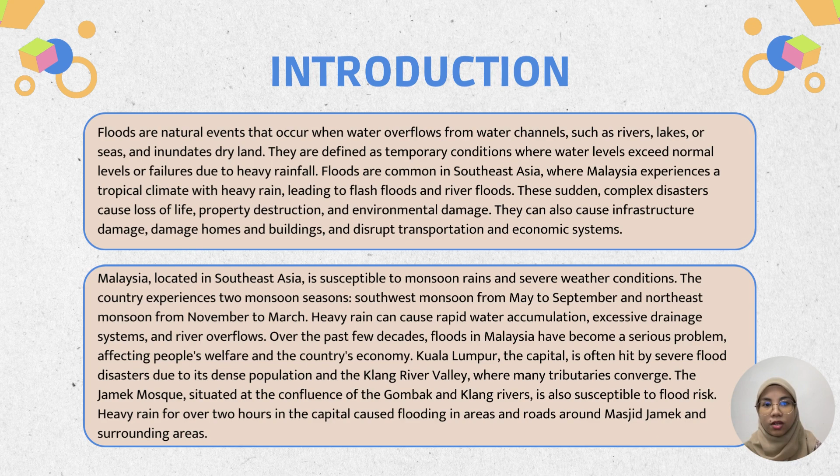Floods in Malaysia significantly impact infrastructure, agriculture, public health, displacement, and personal property. With a population of 5.7 million affected, floods impact about 10.1% of Malaysia's total area, causing annual losses of 1.15 billion ringgit. High sedimentation risk in rivers causes frequent and violent floods in downstream communities.

Flash floods are more common in metropolitan areas due to built-up drainage characteristics. Flooding affects 12% of Malaysia's population, affecting an estimated 29,000 square kilometers, which is 9% of the country's land area. Annual flood damage is estimated at 29.3 million on average.

In conclusion of our project, the hydraulic gate flood barrier is one of the good alternatives to prevent flooding and reduce the risk of flooding in the area. It can also save the lives of people and public property near the flood area. This hydraulic gate is an important element for our country, because our country is one of the countries that often experiences floods. Hydraulic gates play a crucial role in preventing and mitigating the impact of floods.

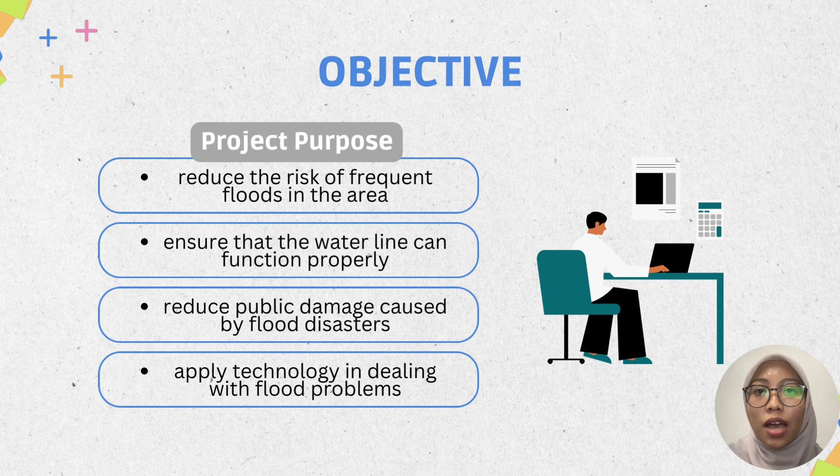There are 4 objectives of our project. First, reduce the risk of frequent floods in the area. Second, ensure that the water line can function properly. Third, reduce public damage caused by flood disasters. And the last one is to apply technology in dealing with flood problems.

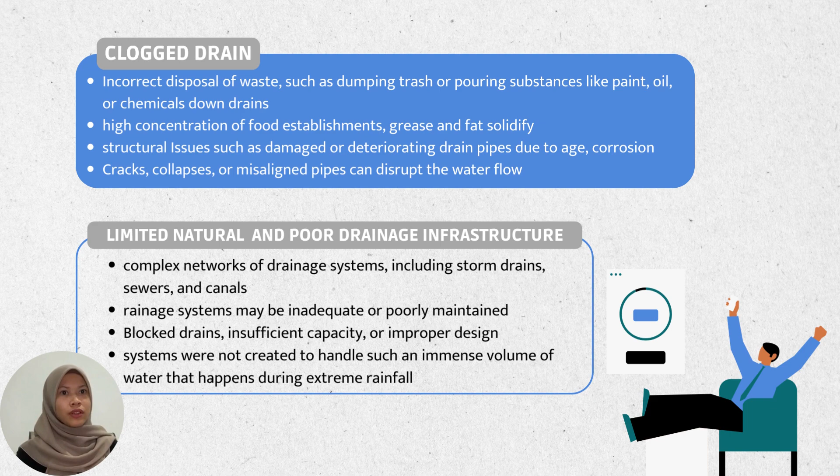Secondly, limited natural and poor drainage infrastructure. As we know, there is a complex network of drainage systems, including storm drains, sewers, and canals. Drainage systems may be inadequate or poorly maintained, blocked, or have insufficient capacity or improper design. These systems were not created to handle such an immense volume of water that happens during extreme rainfall.

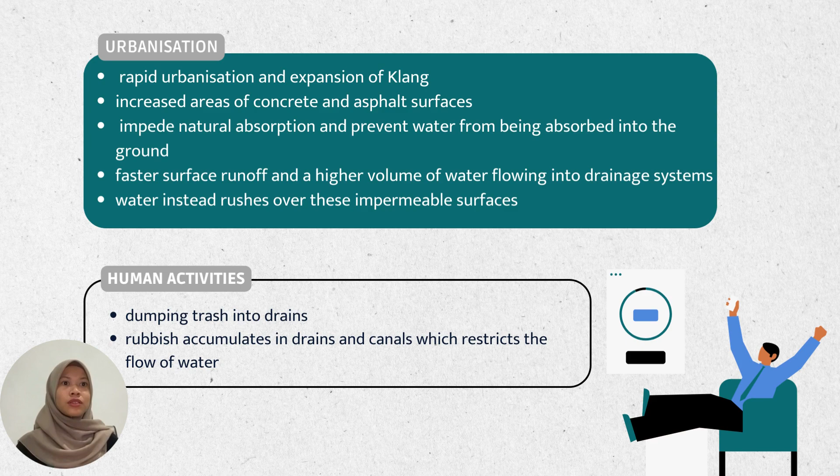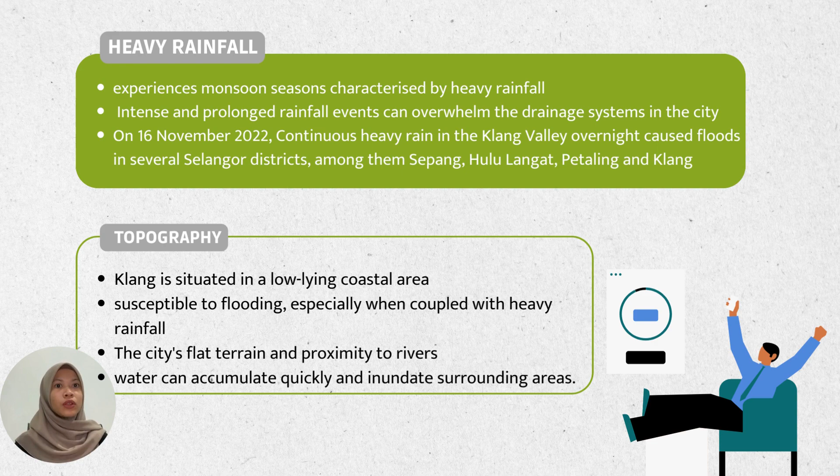The sixth one is topography. Klang is situated in a low-lying coastal area, which is susceptible to flooding, especially when coupled with heavy rainfall. The city's flat terrain and proximity to rivers will make water accumulate quickly and inundate surrounding areas.

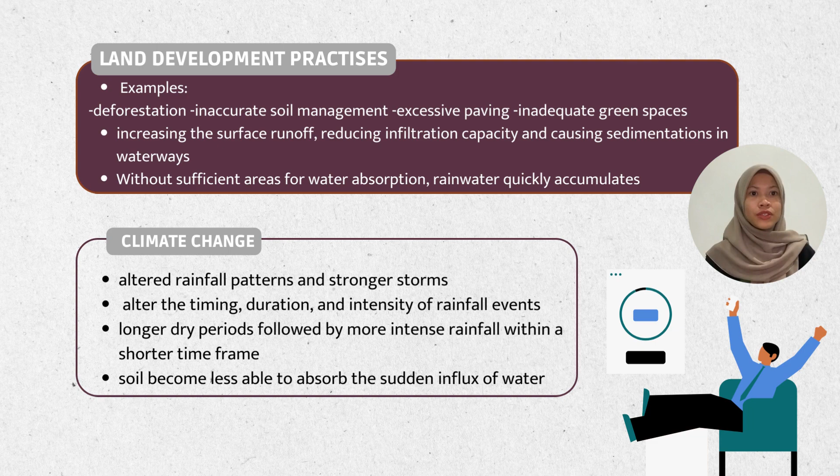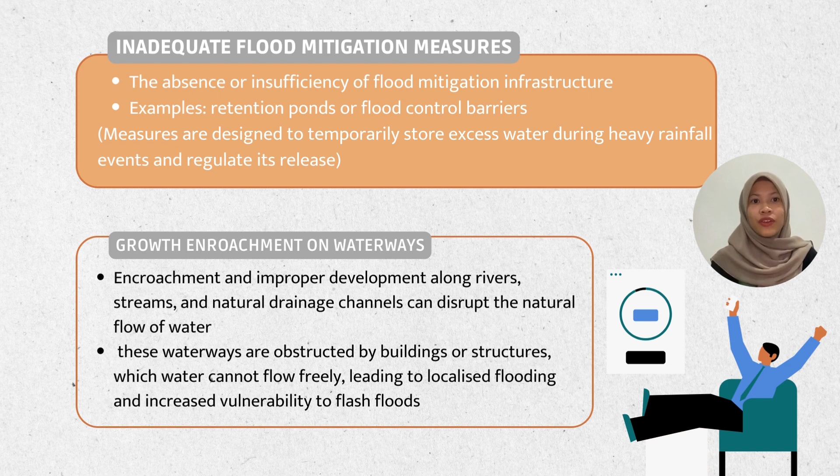Last but not least, the tenth one is the growth and encroachment on waterways. Encroachment and improper development along rivers, streams, and natural drainage channels can disturb the natural flow of water. These waterways are obstructed by buildings or structures so water cannot flow freely, leading to localized flooding and increased vulnerability to flash floods. Next, I will continue about the construction process.

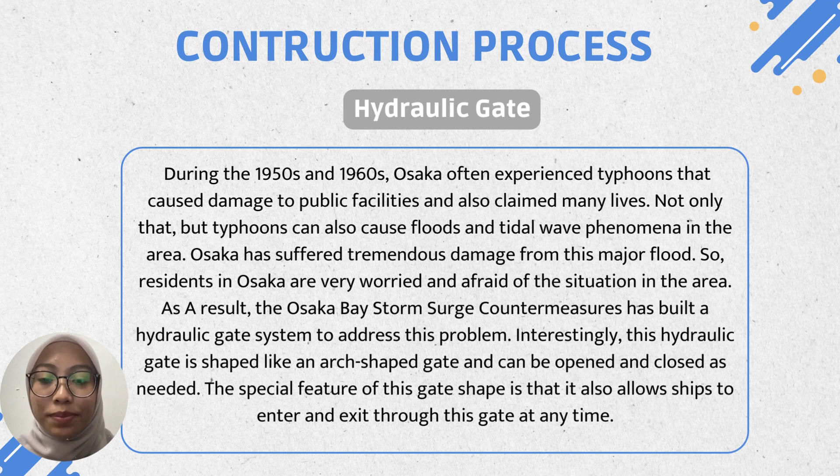Residents in Osaka were very worried and afraid of the situation in the area. As a result, Osaka Bay storm surge countermeasures built a hydraulic gate system to address these problems. Interestingly, this hydraulic gate is shaped like an arch gate and can be opened and closed as needed. The special feature of this gate shape is that it also allows ships to enter and exit through the gate at any time. When a flood occurs, this hydraulic gate will be closed to prevent excess water from entering the area, and it will rise again for the passage of ships.

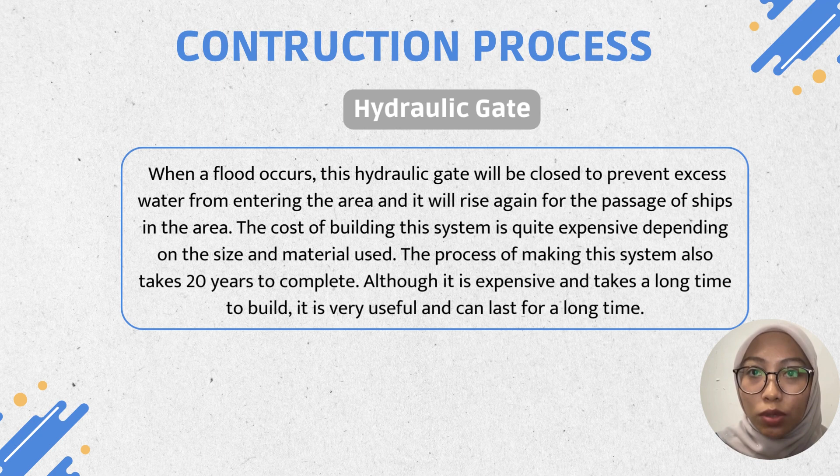The cost of building this system is quite expensive depending on the size and material used. The process of making these systems also takes 20 years to complete. Although it is expensive and takes a long time to build, it is very useful and can last for a long time.

Next, this is the process of our project. The study area near the Tun Perak Bridge in the Klang River area is being studied to prevent flooding. To achieve this, a hydraulic gate is being built, consisting of a gate structure, hydraulic arch, hydraulic power units, control systems, and associated components. The hydraulic power unit generates the hydraulic pressure required to operate the gate, which can be electrically powered or driven by a diesel engine.

The hydraulic system allows operators to manage the gate's movement, including control panels, switches, and sensors. Advanced systems may also incorporate automation and remote control capabilities.

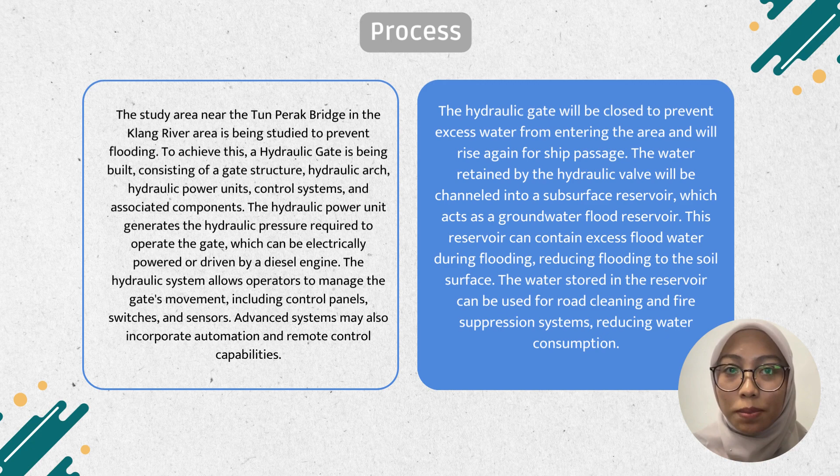The hydraulic gate will be closed to prevent excess water from entering the area and will rise again for ship passage. The water retained by the hydraulic valve will be channeled into a subsurface reservoir, which acts as a groundwater flood reservoir. This reservoir can contain excess flood water during flooding, reducing flooding on the soil surface. The water stored in the reservoir can be used for road cleaning and fire suppression systems, reducing water consumption.

Next, I will explain about the material that we use. The material used to build the system is stainless steel mixed with nickel. This is because steel has high strength and durability and is not easily damaged. In addition, the flexible and lightweight nature of steel makes it easier to form the main panel, which is the door, according to the width and breadth of the river.

The system structure uses the following: depth in the ground of 16 meters, gate panel thickness of 0.3 meters, gate panel width estimated at 6 meters. The material for the underground tank is concrete.

Concrete is the main material used for making tanks because it has stronger strength and durability and is suitable for underground tanks. The depth of this tank is 10 meters and has a width of 15 meters in diameter. The tank can hold 1,767.85 liters of water.

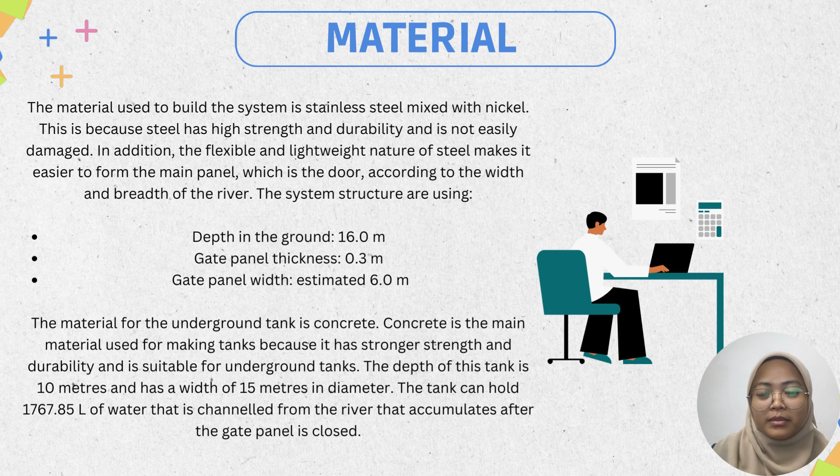That is channeled from the river that accumulates after the gate panel is closed. After that, this is the method of our project. First, this hydraulic gate functions as a barrier to prevent water from overflowing. This hydraulic gate is placed in the section as shown in figure 12 to prevent water from flowing directly towards the flood area.

The second one, the underground water tank functions as a reservoir for water that is channeled from the nearby river. This tank can hold up to 1,767.85 liters of flood water and can reduce the risk of flooding in the Klang River area near the Tun Perak Bridge. When the tank is full, the water inside will be used for non-potable purposes such as cleaning roads or firefighting systems after the flood has subsided.

Underground water tanks are used for storing water from rainwater harvesting systems. It can be used to store municipal and water from other sources for household use. Underground tanks can be used as a water reservoir for irrigation systems. Emergency supplies of water can be safely stored for long periods underground.

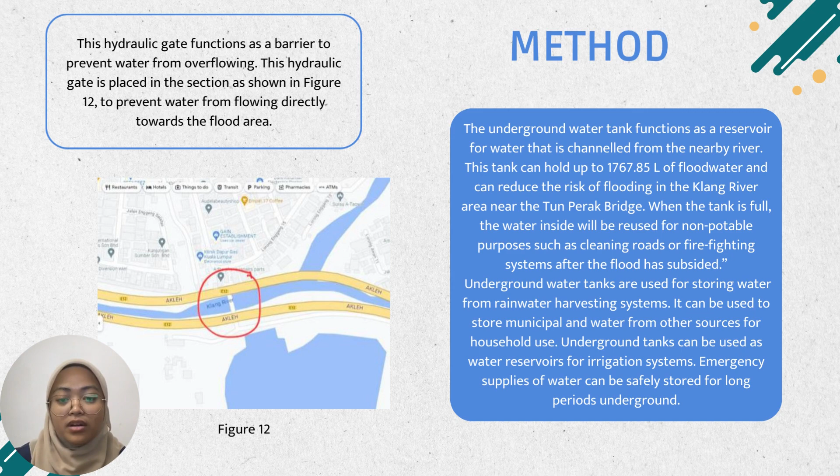For the technology, we are applying the hydraulic gate. A hydraulic gate, also known as a water control gate or a water barrier gate, is a type of gate or barrier that is operated using a hydraulic system. It is commonly used in water management and flow control systems to regulate the flow of water in rivers, canals, reservoirs, and other water bodies.

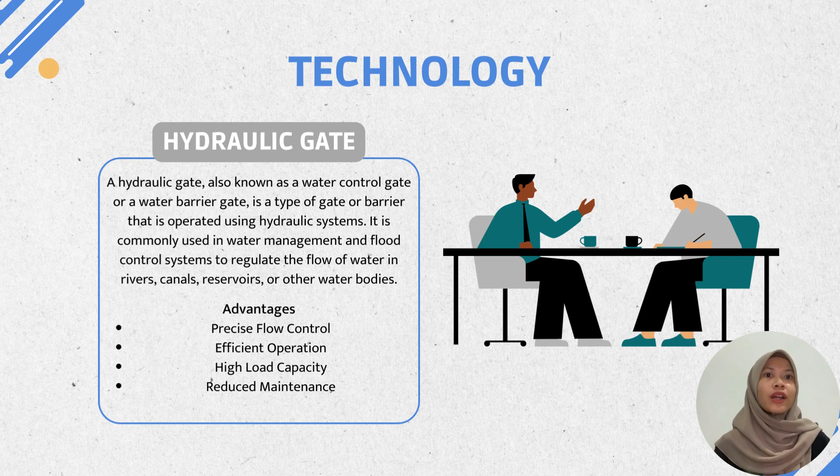The benefits of using a hydraulic gate are precise flow control, efficient operation, high load capacity, and reduced maintenance. Application of the hydraulic gate.

Hydraulic gates are operated by hydraulic systems that use pressurised fluid, usually oil or water, to power the opening and closing mechanism. The hydraulic systems typically consist of hydraulic cylinders, valves, pumps, and control systems that allow for precise control of the gate's movement. The operation of the hydraulic gate is manual.

Hydraulic gates play a crucial role in managing water resources, preventing floods, regulating water level, and facilitating navigation in waterways. Their precise control and ability to handle large water volumes make them essential components of water management infrastructure.

Next, gate opening and closing. The gate is controlled by a button that can make the gate go up and down when necessary. To open or close the gate, the hydraulic power unit activates the hydraulic cylinders. The cylinders are connected to the gate structure and exert force to move the gate. The hydraulic fluid is pressurised by the hydraulic pump and directed to the cylinders through the control valve.

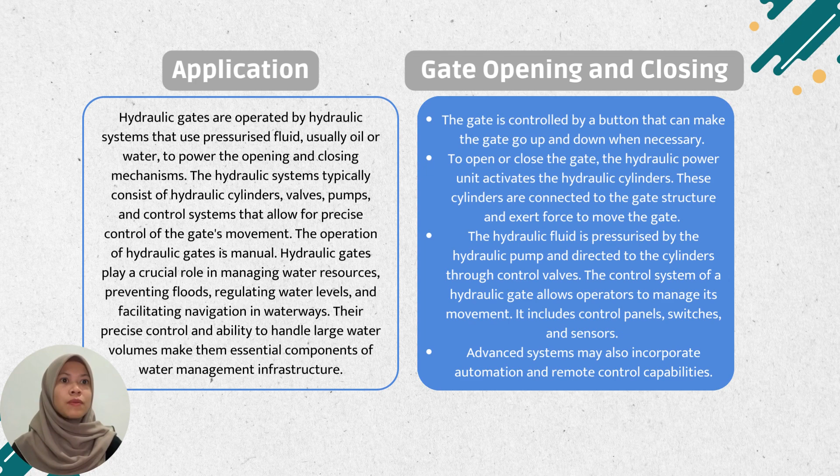The control system of a hydraulic gate allows operators to manage its movement. It includes the control panel, switches, and sensors. This advanced system may also incorporate automation and remote control capabilities.

Next, the installation of the hydraulic gate. First of all is installation of the gate structure. Install the gate structure including the gate frame, gate panels, and any associated components. This may involve welding, bolting, or other methods of attaching the gate components securely to the foundation or supporting structure.

Then we can continue to the hydraulic system installation, which installs the hydraulic system components including the hydraulic cylinders, valves, pumps, and control systems. Connect the hydraulic components to the gate structure and ensure proper alignment and functioning.

Next, for the maintenance, a regular maintenance schedule ensures the gate's ongoing performance and longevity. Regularly inspect and service the hydraulic components to monitor system performance and address any maintenance or repair needs promptly.

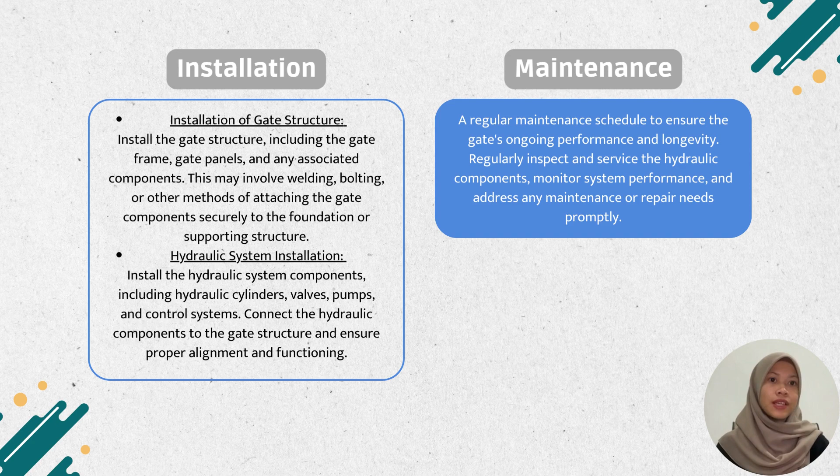In conclusion of our project, the hydraulic gate flood barrier is one of the good alternatives to prevent flooding and reduce the risk of flooding in the area. It can also save lives of people and public property near the flood area.

This hydraulic gate is an important element for our country because our country is one of the countries that often experiences floods. Hydraulic gates play a crucial role in preventing and mitigating the impact of floods. Their ability to regulate water flow, divert water, store and release water, and facilitate emergency response makes them essential components of flood control infrastructure.

By effectively managing water levels and flow rates, hydraulic gates help prevent excessive water accumulation and redirect water away from vulnerable areas. They contribute to the overall integrated flood management system, working in conjunction with early warning systems, flood forecasting, and other protective measures. Additionally, hydraulic gates are instrumental in coastal flood prevention by controlling water flow during high tides or storm surges.

The water that accumulates when the gate is closed will enter the underground tank space to reduce and prevent flooding. Overall, hydraulic gates are vital tools in flood prevention efforts, helping to safeguard communities, infrastructure, and the environment from the devastating impacts of floods.